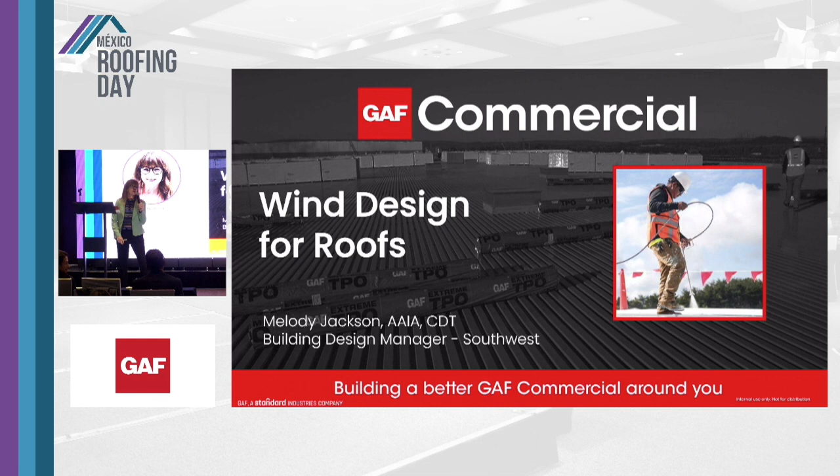Today we'll be talking about wind design for roofs. This is a very timely topic considering we just had Hurricane Otis that came in on the western coast of Mexico. How many of you have had hurricane damage to your home or your business? Anyone? Am I the only one? I have a beach house on North Padre Island near Corpus Christi, and I had flood damage and wind damage. I lost my roof from Hurricane Harvey. So this is a topic that has impacted me personally. I've done a lot of hurricane area projects as a spec writer, so this is kind of a topic that's very close to my heart.

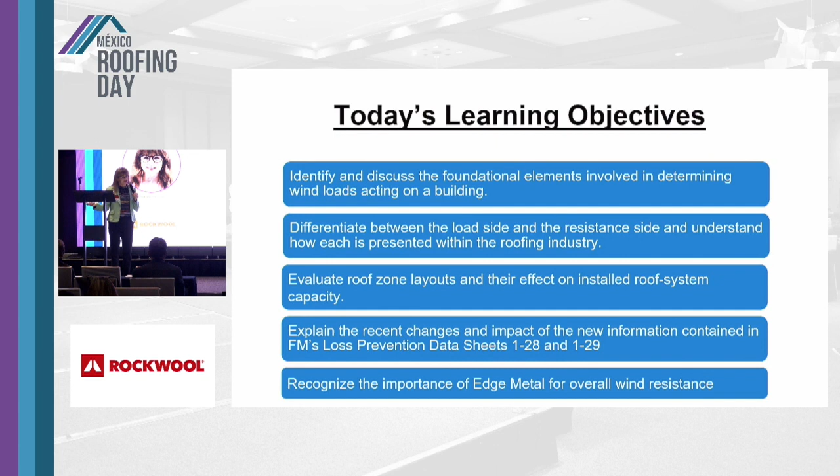So we'll be talking about wind design for roofs today. So today we'll identify and discuss foundational elements involved in determining wind loads acting on a building. So we have various loading things to look at.

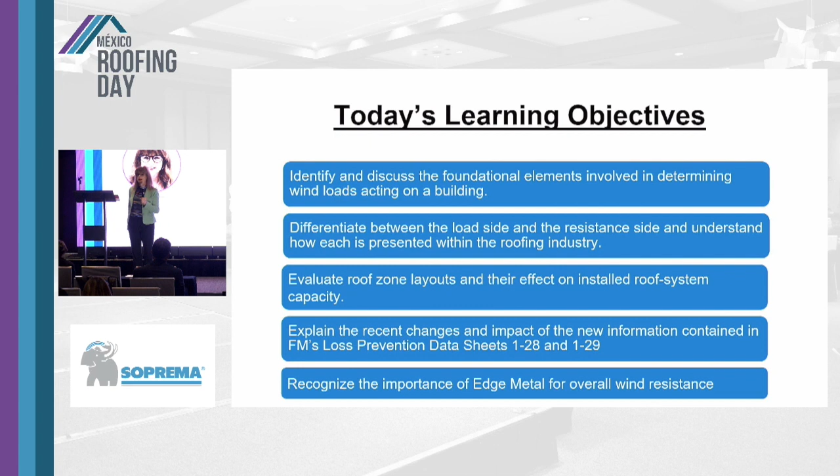We'll learn the difference between the load side and the resistance side, and we'll understand how each is presented within the roof industry. We'll evaluate roof zone layouts and their effect on the installed roof system, and we'll explain recent changes and the impact of new information from FM Loss Prevention Data Sheets 1-28 and 1-29. These are really important documents for us. And we'll talk a little bit about edge metal and how important that is for designing a roof system that will withstand these hurricane uplift conditions.

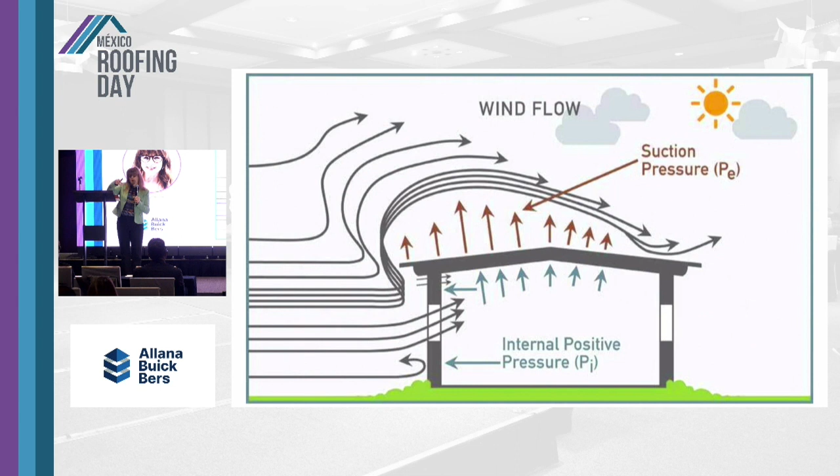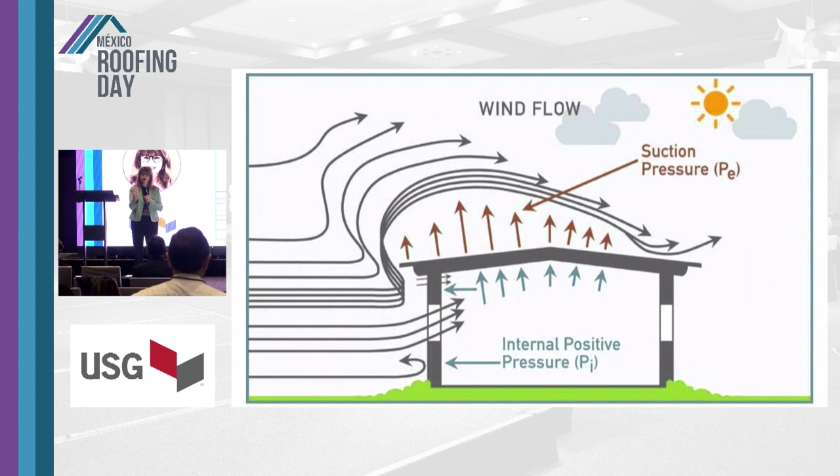So first of all, we'll just look at a simple building here, and we'll see as the wind approaches, it will go up and over the roof, and that will cause a negative pressure, a negative design pressure, pulling our roof up and off of our building. If we have a breach in the building envelope, we lose a door, the glass is blown out of a building, we have a large missile that's destroyed our windows, we will have internal pressurization of the building, and now we have positive loading pushing the roof off from the inside. So we have various mechanisms to lose our roof.

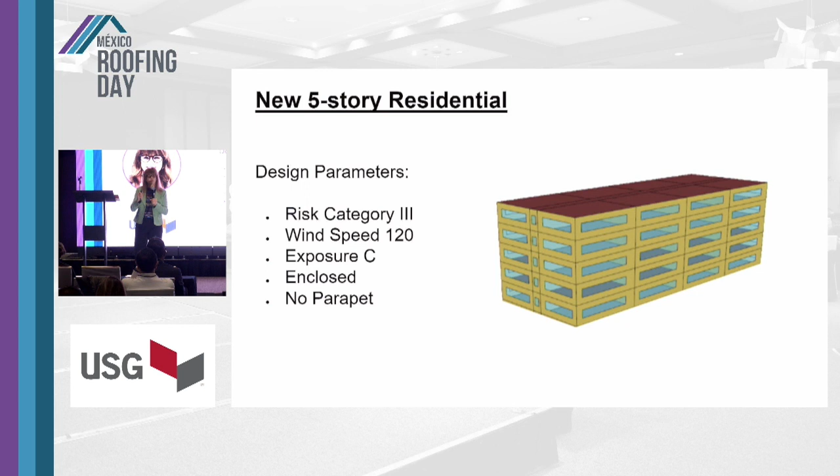But it's not. We have high wind speed, 120. Hurricane Otis was much, much more. This is exposure C, a pretty flat terrain, so this might be the biggest object in the area, and it's enclosed. We'll go over later about what a partially enclosed or an enclosed building means. And this project has no parapet.

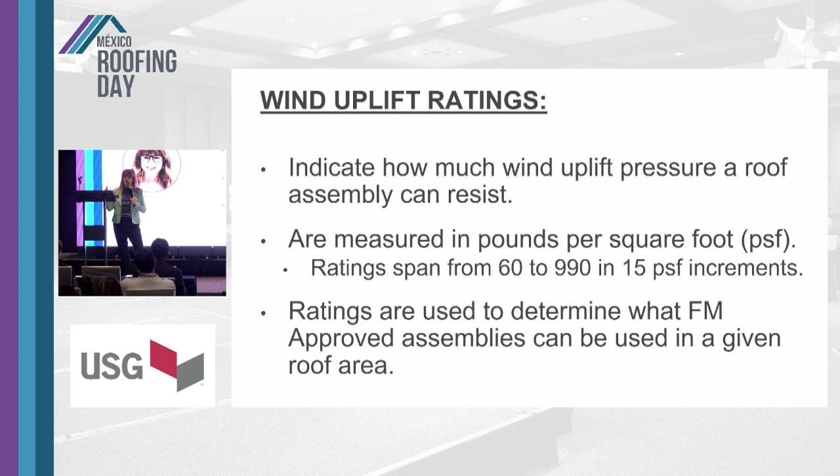Our wind uplift rating indicates how much wind uplift pressure a roof assembly can resist. This is not just the roof membrane, this is our whole assembly. It's measured in pounds per square foot, with ratings spanning from 60 to 990, in 15 PSF increments. This will be important to remember later when I talk about going from a 1-75 rated system to a 1-90, so you can see that 15 PSF increment.

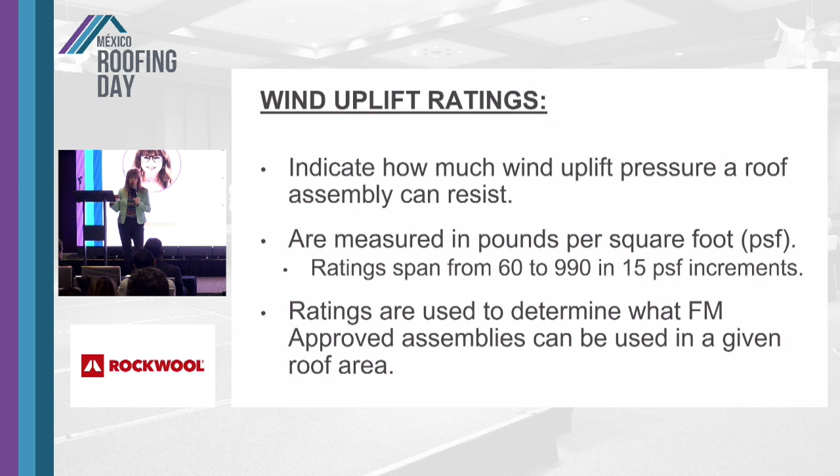The ratings are used to determine what FM-approved assemblies can be used in a given roof area. First we'll click on the wind tab, which will give us a rating. But first we need to think about the load side variables that help determine that rating: surface roughness, the location of our building, the basic wind speed for that location, the exposure classification, and the roof dimensions, which are important.

First we'll look at the surface roughness category, which is roughly defined, not the strict definition. We have roughness B, which is urban and suburban areas like Mexico City or the suburbs, or wooded terrain with lots of obstructions where the wind just doesn't go past. Surface roughness C is pretty open terrain, where obstructions are generally less than 30 feet, so this is pretty flat open country. Surface roughness D are water surfaces or flat, totally unobstructed areas.

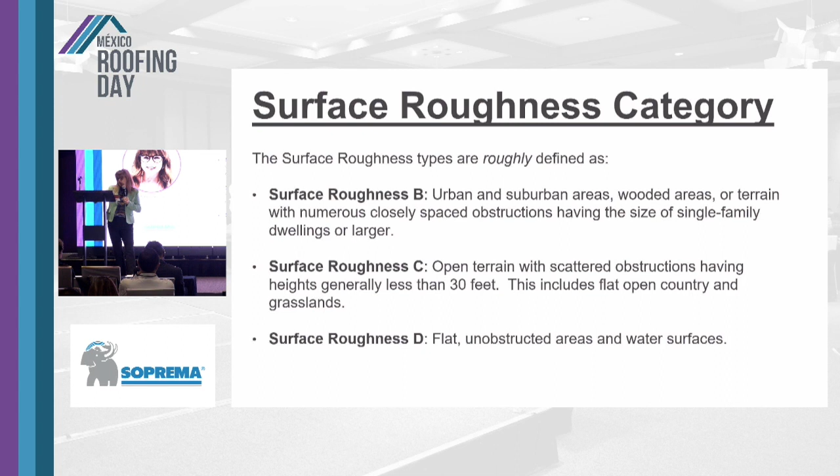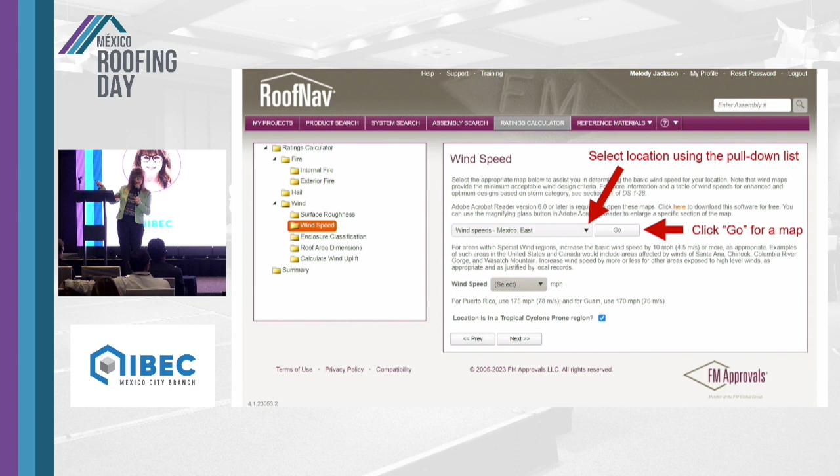We also need to look specifically at the location of our building and the basic wind speed, and FM RoofNav will help us determine that. After we click on wind speed, we can enter Mexico East, Mexico West - there are several locations you can select. For this sample, I selected East. Then you click Go, and RoofNav gives you a wind map for the eastern coast of Mexico. This is our LPDS 1-28, and this is going to be really golden information for you.

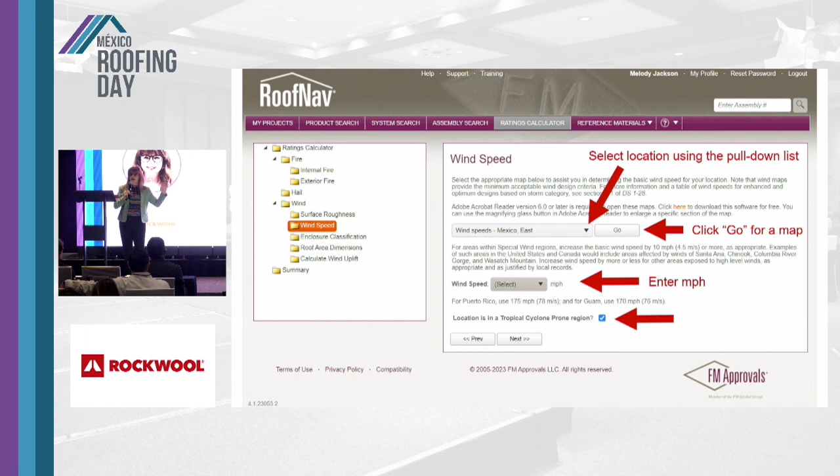So we will take this information and use it later. But there's another way to do this: we could enter the miles per hour if we already know the wind speed at our location, or if we want to increase the specifications to a higher level, we can select a higher anticipated wind speed than we would normally see in that area.

You need to keep in mind that your specifications for your project are minimum standards. Another way to think about minimum standards is it's your best, worst building. So for something like an essential facility, like a hospital, police station or fire station that needs to remain in operation during a storm, you want to design to a higher level. Here you could put in the specific wind speed you have in mind, and we will always check that blue box: Location is a tropical cyclone prone region, when we're designing for hurricane uplift.

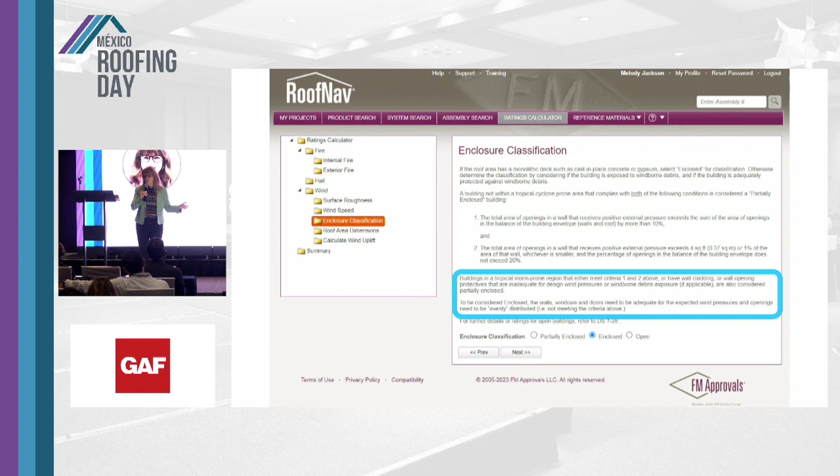So we need to also think about our exposure classification. What does that mean? In a tropical storm prone area where we think we will lose windows and doors, for example in a home, houses are usually designed to a lower standard compared to commercial buildings. So we will probably lose a window. We have flying missiles, rocks, lawn furniture that blows around - we have a 4x4 that could go through your roof or window.

So we will consider those partially enclosed, but if we've designed the building to very high standards so that our openings, our doors, our windows, big roll-up doors, are missile D impact resistant, then we could consider that an enclosed building. This will make a big difference in getting to our end result. For this sample, I have selected enclosed buildings, because we're designing a wonderful building that should withstand a hurricane.

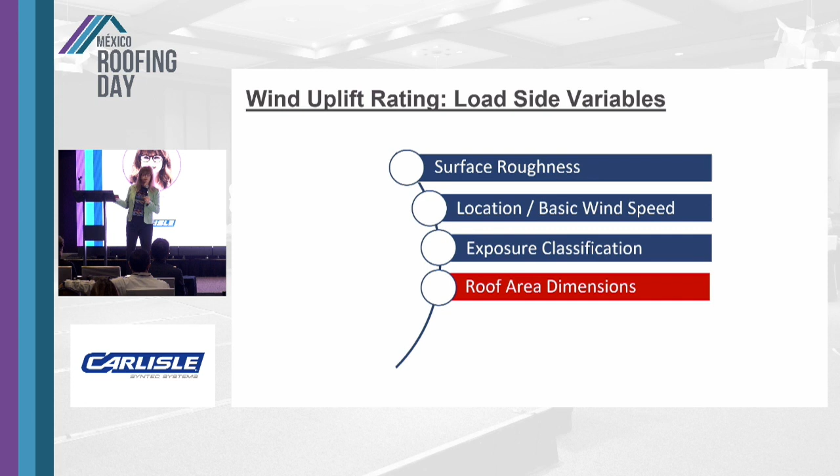Then we have to consider our roof area dimensions. These are very important because this will change a lot of things on your project, including fastener spacing. So our next step would be to enter our roof area dimensions, and you'll have pop-up boxes on the right so you can enter your dimensions. Super simple. What you get is your wind uplift calculated, and you get a sheet that looks like this on the right.

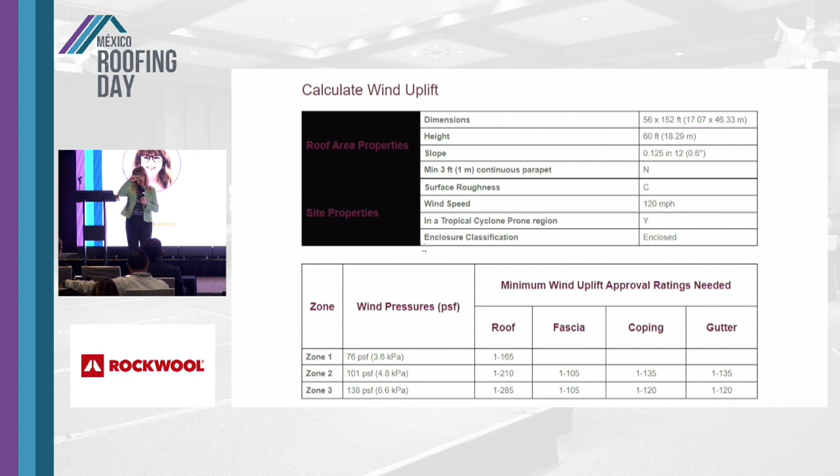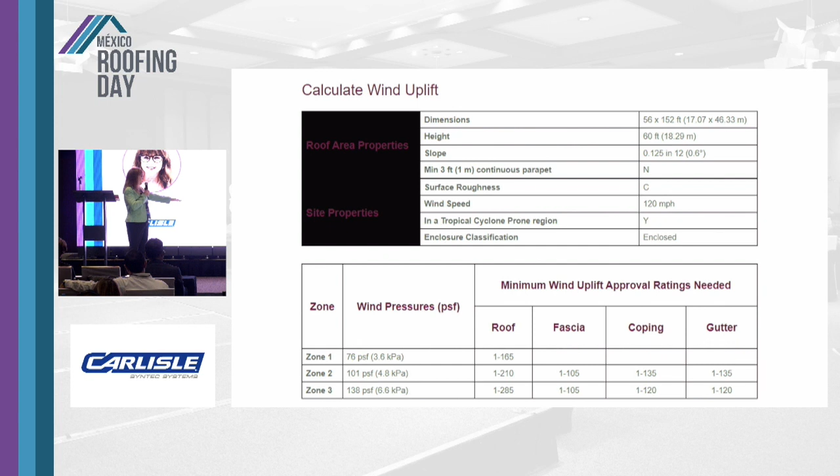I'm going to look at that in two parts so you can actually read it. The first part on the top just gives you back the information you just entered, so this is a real easy way to check your work and make sure you entered the right numbers. At the bottom, you will see your wind pressures in PSF that RoofNav has calculated for you. For zone 3, which is our corners, that's where we have the highest wind uplift - we have 138 PSF. So is that the number we need?

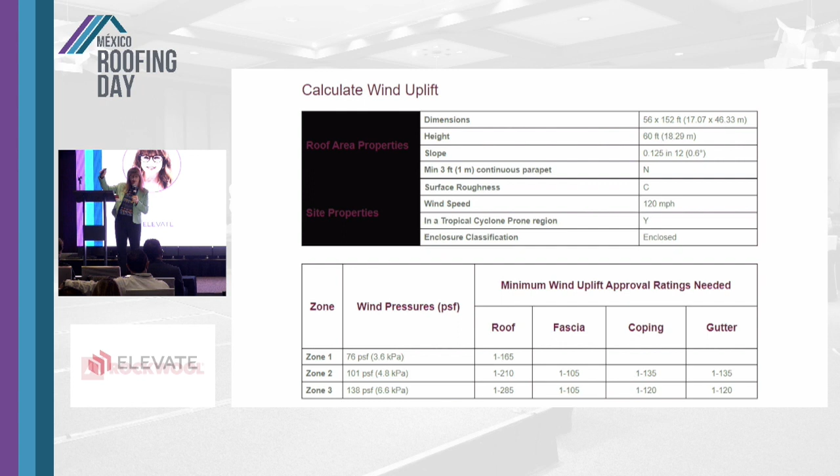No. RoofNav has applied a safety factor of 2 and has determined that we need a 1-285 system. If you want to design to a higher standard, you could go up 15 more PSF, that's our 15 increments, and we could do a 1-300 system.

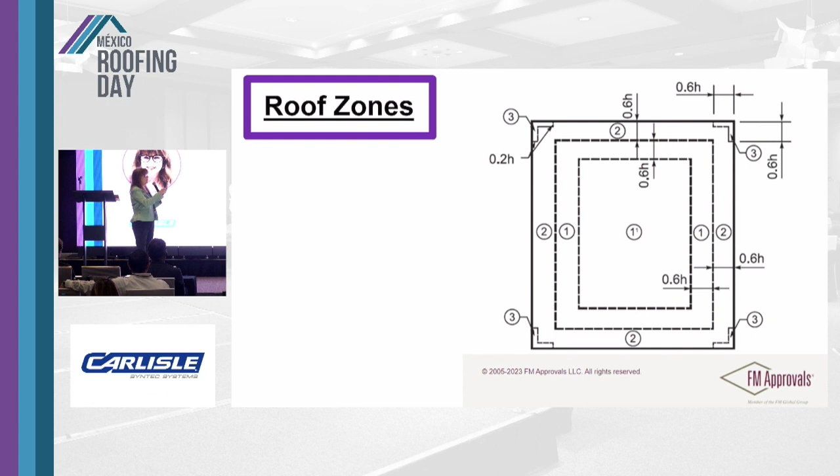So here we're looking at our roof zones. This is very simple in a rectangular shaped building, but what if you have an L-shaped building? What if your building is shaped like a Z or any other crazy thing an architect could come up with? And most of the time they will come up with something unusual. Then a lot of things change. So your outside corners will always be zone 3. If it's an inside corner, it's not. It can get very convoluted. There's ways to dive deeper into that, but I did not have time today. But just keep in mind that that will change.

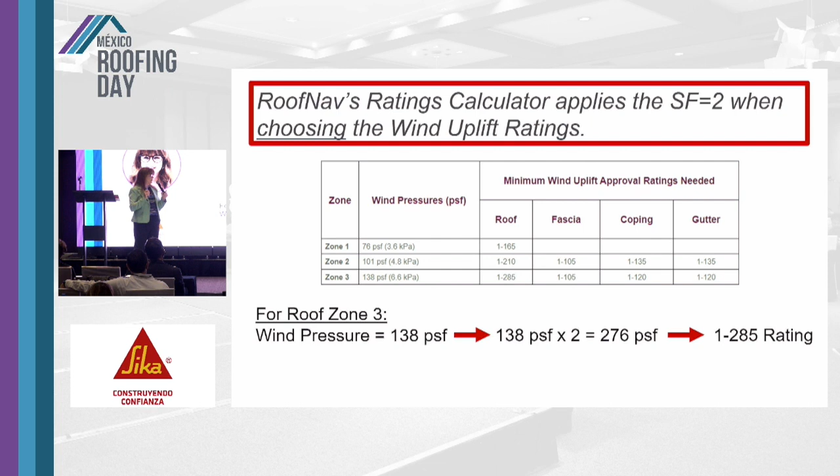Our zone 2 is the perimeter of the building, and then zone 1 is the main field of the roof. But our biggest takeaway is that RoofNav applies a safety factor of 2, like I said before. So we go from 138 PSF in this bottom corner, zone 3, and multiply that times 2, and then we need to jump up in 15 increments. So we end up with a 1-285 rating. So now what do we do with that?

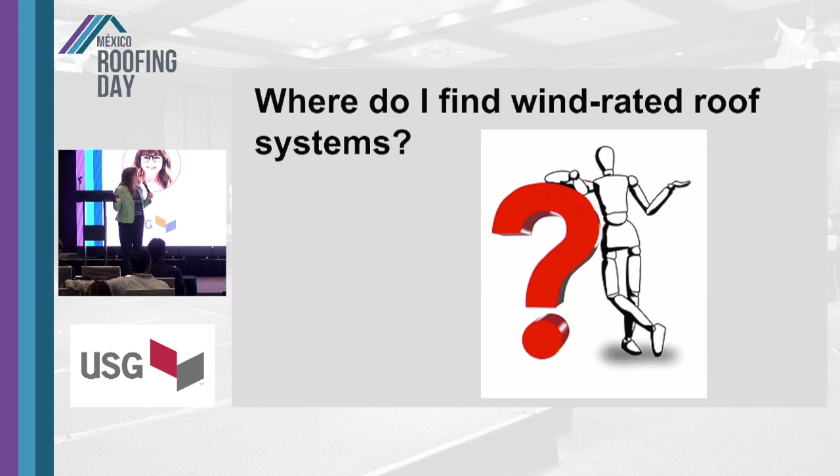Before we go further, we need to look at the wind uplift on the resistance side. So where do I find this wind rated system? Okay, that's the question. Like, where do I go next? There are various listing agencies that have roof systems approved for the uplift you have determined you need for your project.

So we've been using RoofNav, but a lot of people are very familiar with Miami-Dade. They were really the first to come up with these standards we want to adhere to, sort of the gold standard. I live in Houston, Texas, so when I was writing specifications full-time, I would always refer to Texas Department of Insurance, which also has a lot of ratings, so that's another way to do it. All of these are great listing agencies, but you need to be careful because some of them apply the safety factor of 2 and some do not.

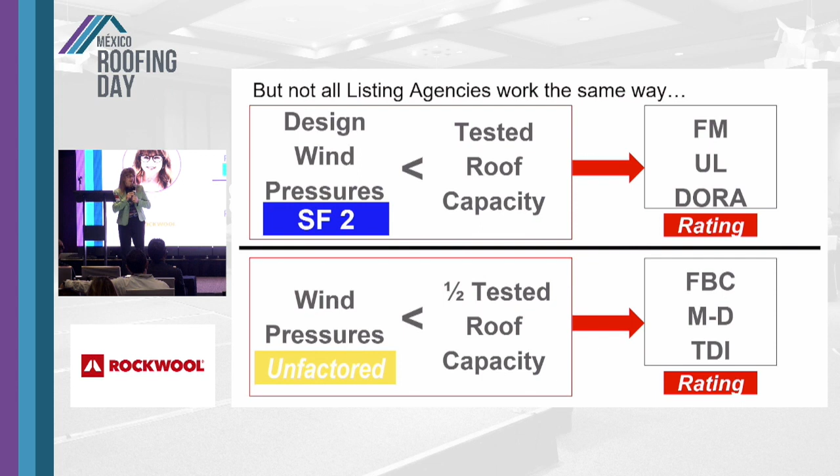So when you're looking at an FM rated system, you will see that the safety factor of 2 has been applied. We saw that before in that calculation, multiplying times 2. If you look at Florida Building Code Miami-Dade or Texas Department of Insurance, the safety factor of 2 is not included. So you have to be mindful of which listing agency you're using and exactly what information you're getting.

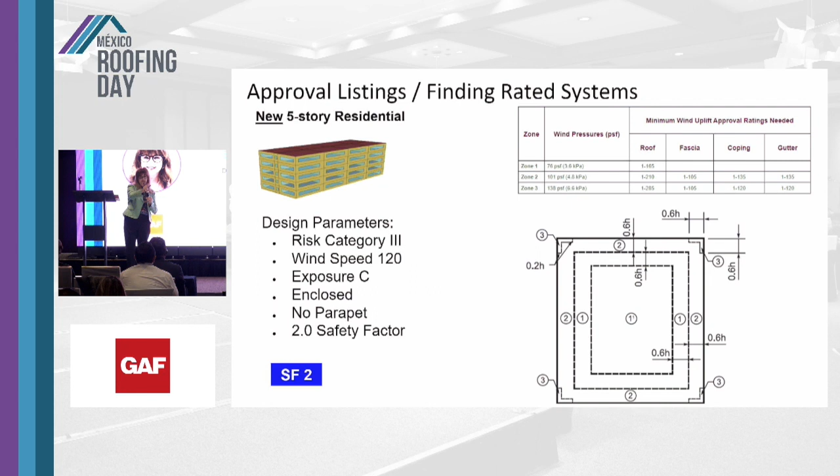So let's keep going with our RoofNav and select our actual roof system. Here we are. We have our data from the first part of this presentation, and we're using the safety factor of 2 since it's RoofNav. So we will keep going. Now we can select assembly search, that's the red box at the top, so we can get rated assemblies. If you just click that button, you get 1.1 million approved listings. So where do you go from there? There's still a lot of work to be done, and we can narrow that down.

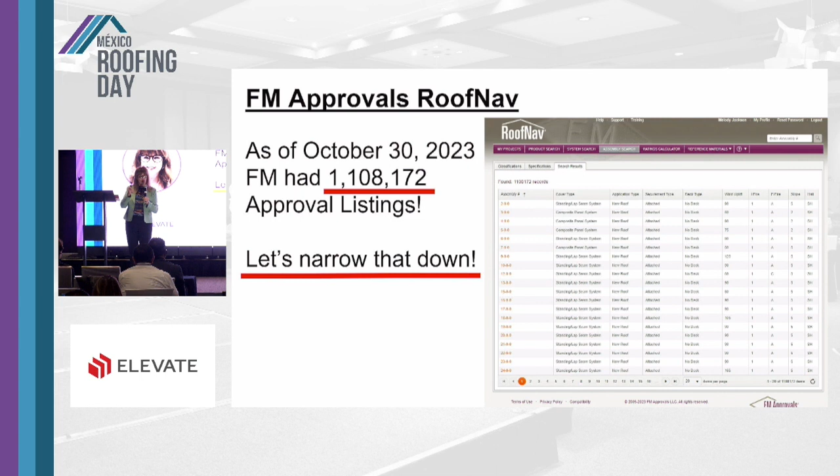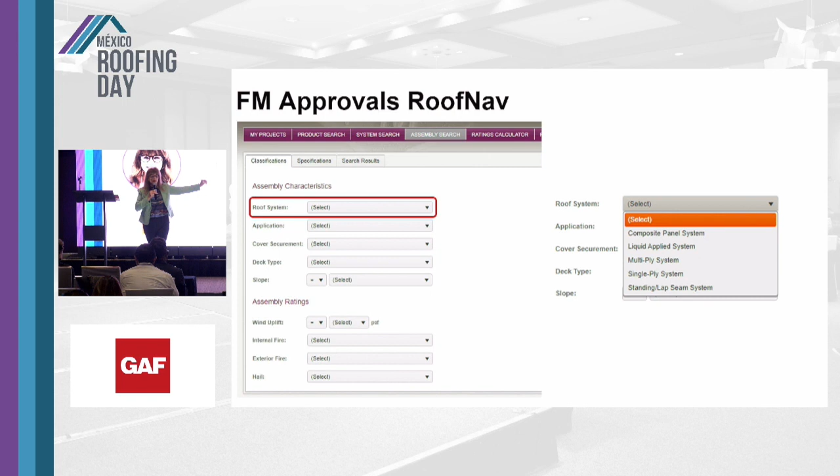So what we will do is go to assembly search and fill this out with all the information related to our project. For example, here we can select our roof system, and the pull down on the right says we can have a standing seam roof, a single ply system, a multi-ply system like a mod bit or an APP mod bit, a liquid applied system, and we heard about all those different systems in our last presentation on vegetated roof, right?

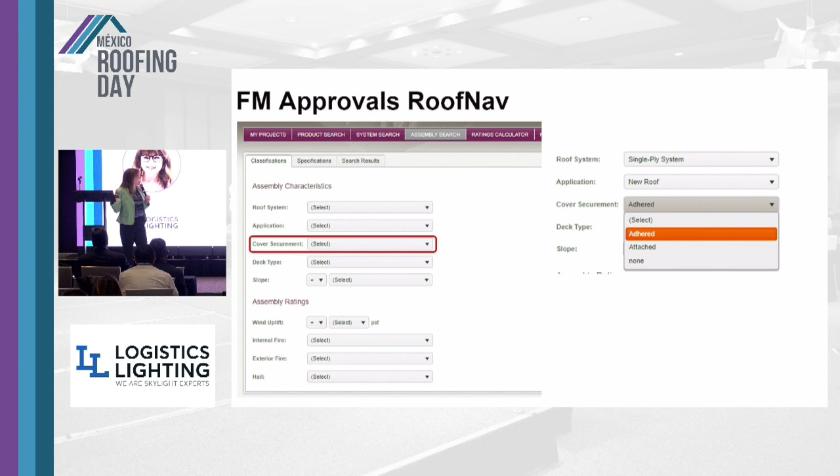So then we're going to think about the application. Is this a re-roof or is this a new roof? All of these things matter. We're going to pick whether we want it to be a mechanically attached roof or whether we would like an adhered system. It also had the choice of none, which I don't understand.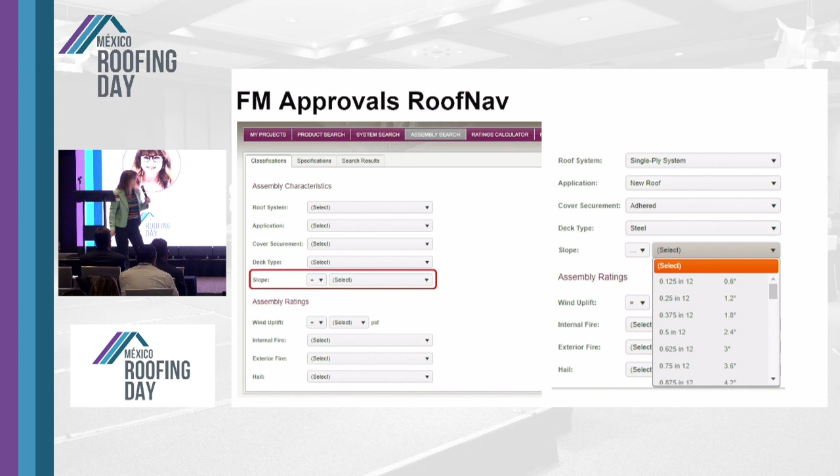We're going to select our deck type. If we know it's a metal deck, wood deck, or concrete, for example, we'll make our selections here. We'll enter the slope. Here, it gets very specific, so it's easy to select the slope for your project. And so now we have our assembly characteristics. These are all the selections we just made.

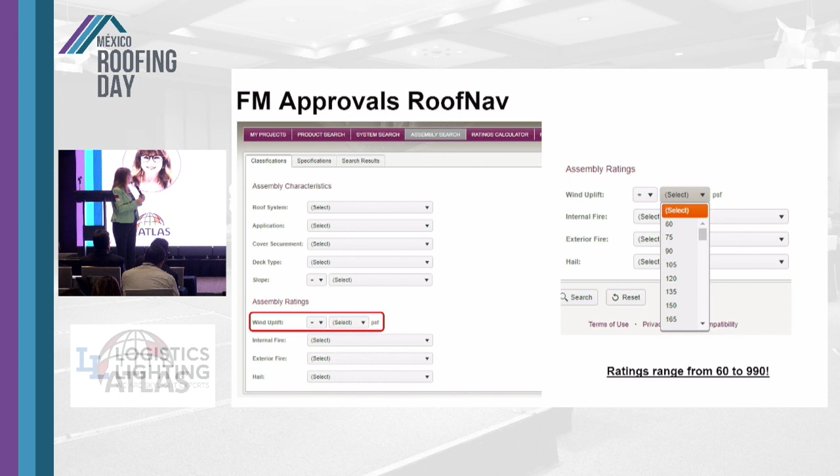So on our wind uplift, our ratings are from 60 to 990. We calculated that, so we can enter that number.

Here's where we can enter our internal and exterior fire protection ratings. If we want a Class A rating, we can select it there. And we can select whether we're in a hail region or not - you don't have to select that at all, but there's VSH for very severe hail, and severe hail.

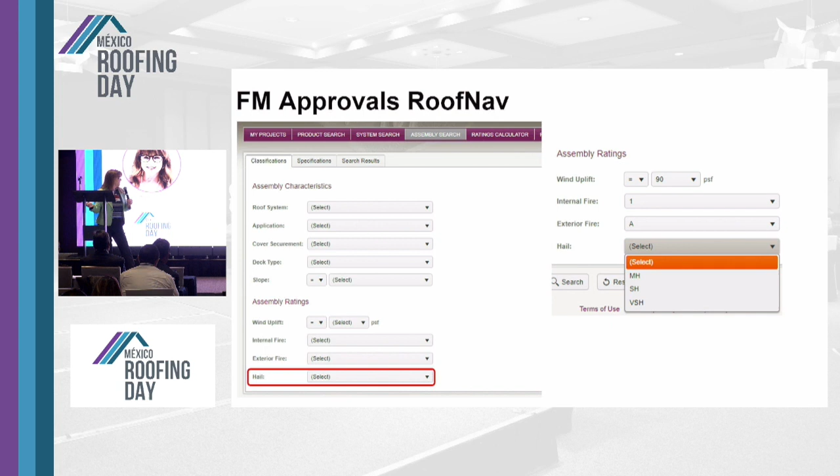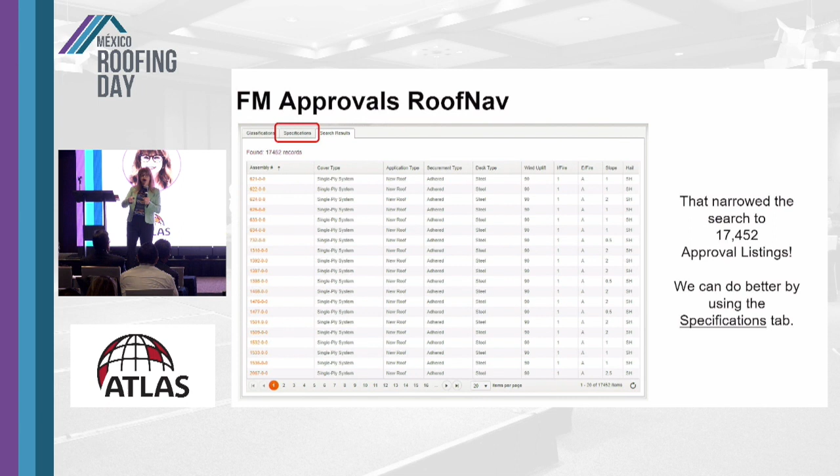Now we have all of these things I discussed already selected, and this helps us a lot because it narrows our search down to a little over 17,000 approved listings. So now we can go to the specifications tab and add even more information, which will bring this down to a smaller number, because no one wants to look through 17,000 listings.

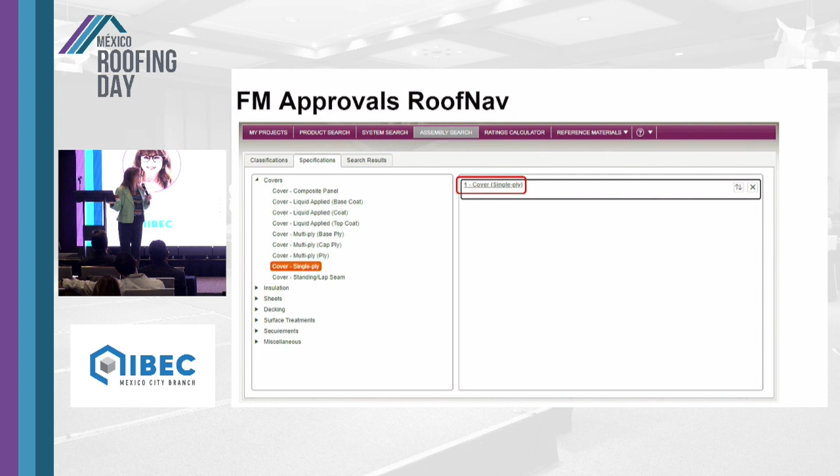So what we'll do is look first at the covers. It's called covers, but basically this is our waterproofing membrane for our system. I've selected single ply just for the example, and then we'll enter details about this single ply roof we've selected.

So here I have selected a company. If you know you like GAF, you enter that. If you like Soprema, you enter that. If you like Johns Manville, you enter that, and this will help you narrow it down.

Just by selecting GAF, we went from 17,000 choices to 842 for GAF alone, and the other manufacturers will similarly have a lot of choices.

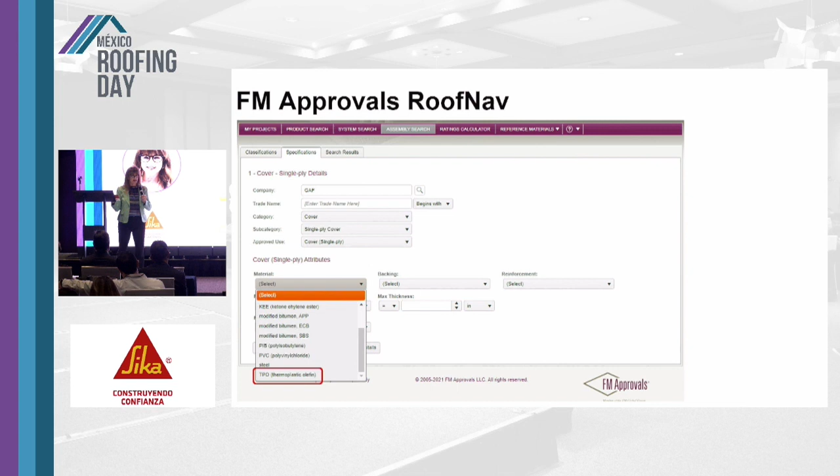Now I'm narrowing my selection even more. I'm going from single ply membrane - I want a TPO membrane, because I'm a TPO fan. I'm going to enter the thickness desired, so on this sample it's a 60 mil membrane. If you're designing for an essential facility, I'd probably go to an 80 mil membrane, to beef up the system a little bit.

And now this has narrowed us down to 24 approval listings, but we can do even better than that.

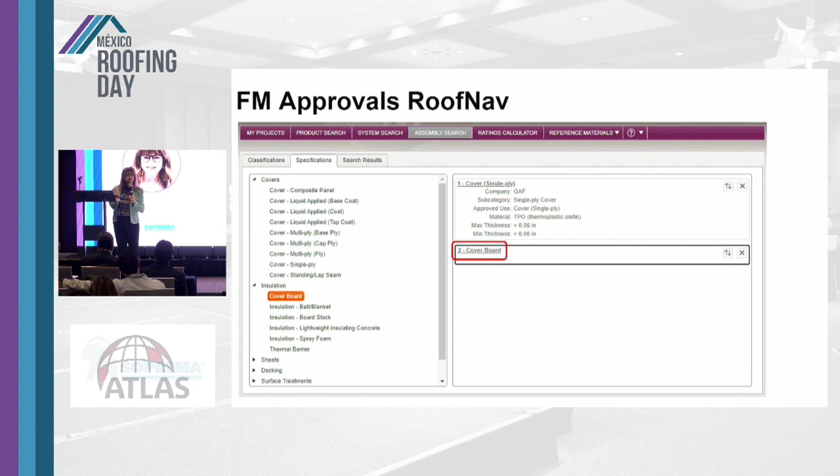We can start selecting other parts of the assembly, like our cover board. You always want a cover board. There's a lot of controversy about this - a lot of people say, oh, we don't need it, we install roofs without a cover board all the time. But the cover board is really going to help you in high uplift situations and in hail situations. Cover board is very, very essential in my opinion.

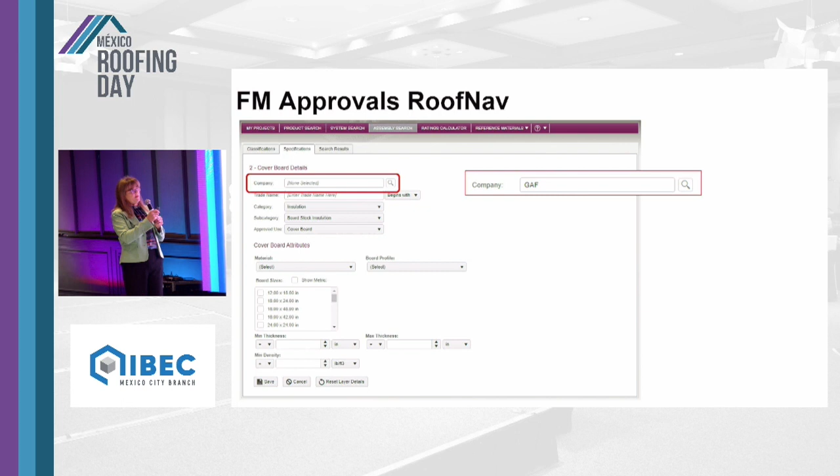We can select the manufacturer of the cover board, which narrows it down even more. Now we're down to only 2 systems that are approved for the uplift we entered earlier. So now we have an assembly number - this is what we're looking for.

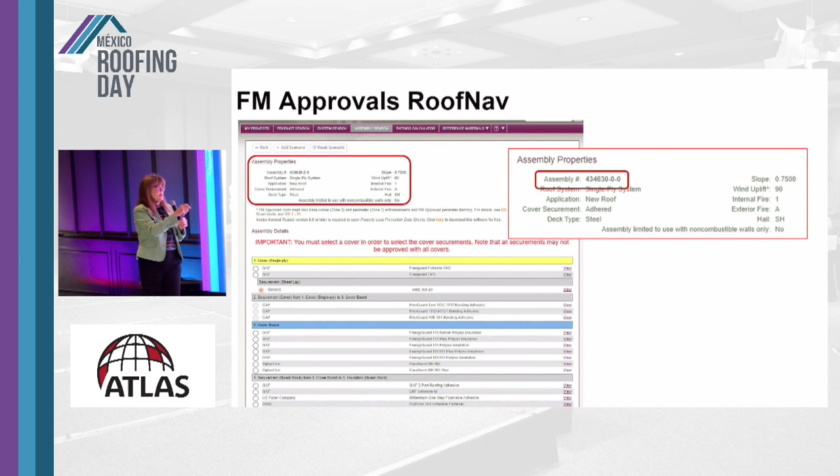With that assembly number, you see on the right we can go on and enter even more information. So when we start making these selections, over on the far right side, we'll see the little view button. When you click that button, you'll get more information about the product selection you've made.

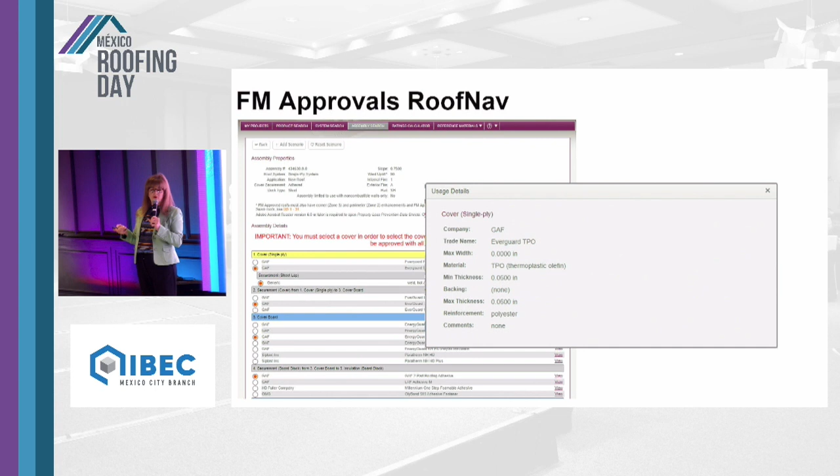For example, here for the single ply GAF membrane, we see the membrane itself is called Everguard TPO - it's a 50 mil, we entered that, with polyester reinforcement. So just a little extra information about the selections you have made.

So here we're looking at the cover board - we narrowed it down to a GAF manufactured cover board. And that's the little click on the view - it gives you that info.

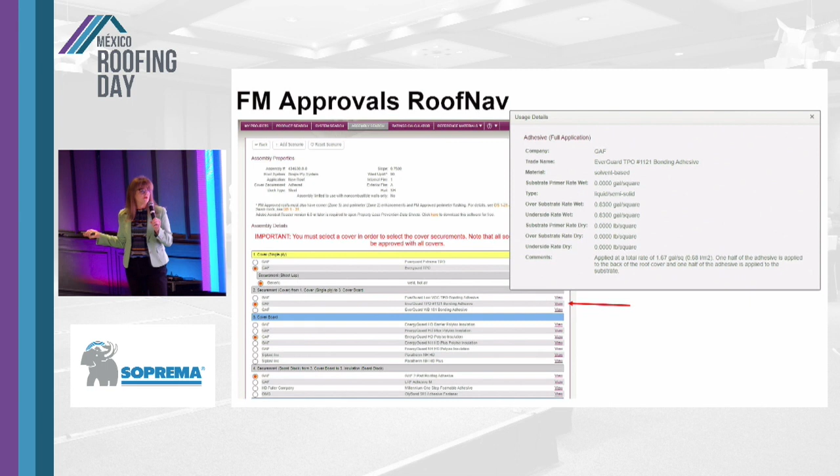So now we can go a little further, going down to the cover board - the view gives us this. When we select polyiso insulation, we get this one. And we continue making selections based on the board stock, the cover board, the insulation.

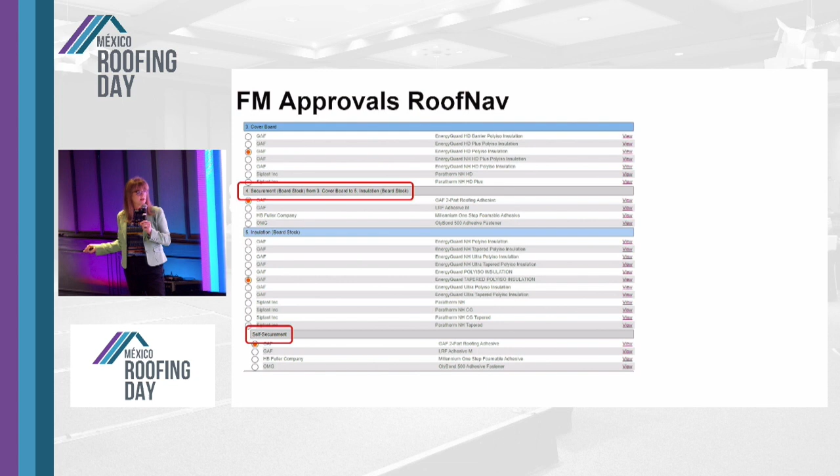And we are now thinking about this as an entire system, not just the waterproofing membrane itself for the roof.

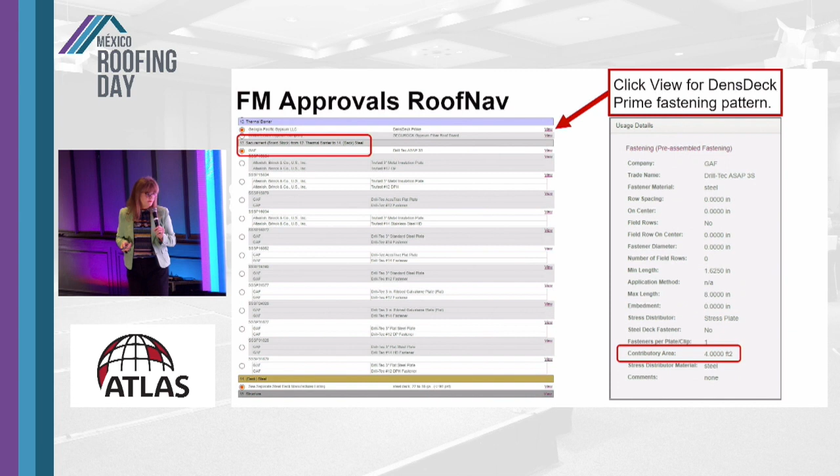So here we are going to select on our securement to get a fastening pattern for our system. We're looking at a contributory area of 4 square feet, and what this looks like, if you do it in plan, in zone 2, we will have this fastener pattern.

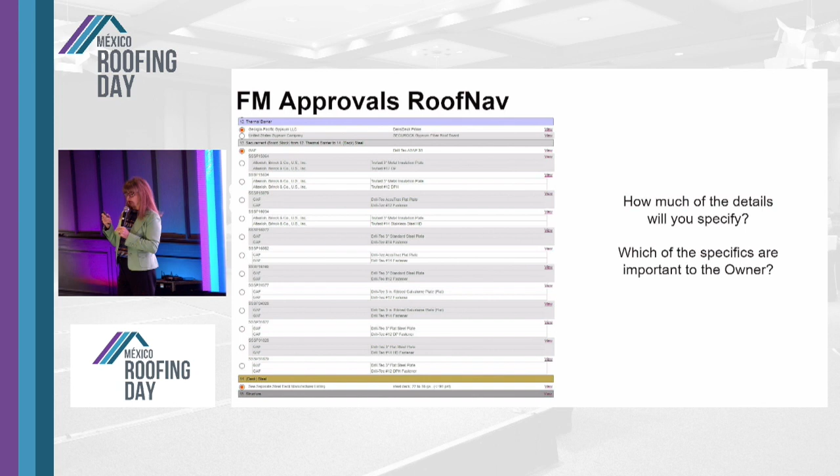We'll come back to that and see how it changes in the different zones on our roof. So we can add more information - the owner may have specific products or manufacturers they want, or the architect may be specifying this. All of these things are taken into consideration - you can add more and more info if you want to.

One thing to keep in mind is the RoofNav ratings calculator determines our designed wind pressure per the LPDS 1-28. Remember that RoofNav always applies that safety factor of 2. When you look at RoofNav's wind uplift ratings, they're determined by actual physical testing, and these increase in increments of 15 - so a 1-60, 1-75, 1-90 will not have the safety factor built in.

So this gets a little confusing - you really need to know exactly where you're at in this process. So a 1-60 rating means that this roof will fail somewhere between 60 and 74 PSF, because 1-75 would be our next level up, right?

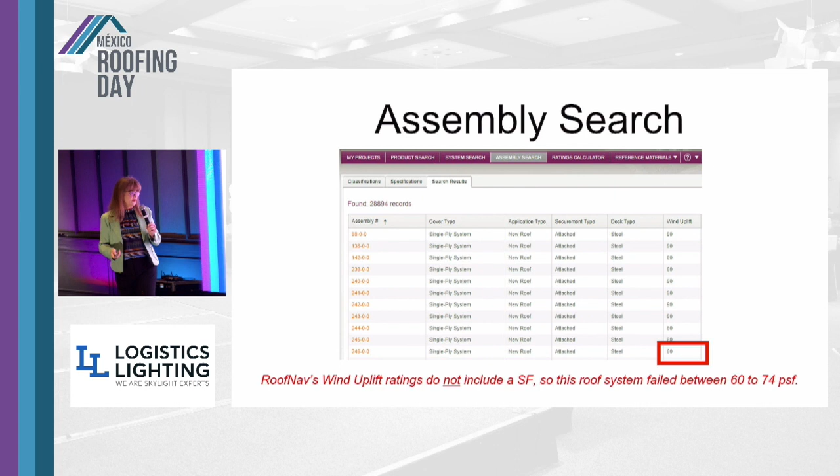So on our assembly search, if we just type in our assembly number, you will get something that looks like this - so we'll have a 60. That did not include our safety factor.

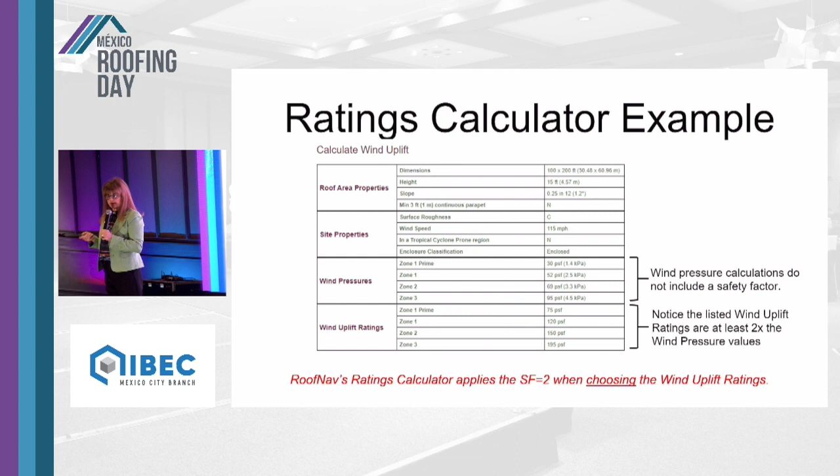If you look at the bottom two sections of this diagram, you'll see that the wind pressure calculations do not include our safety factor, and that our wind uplift ratings do include the safety factor of 2. I'm repeating this because it's really important to distinguish between these two numbers.

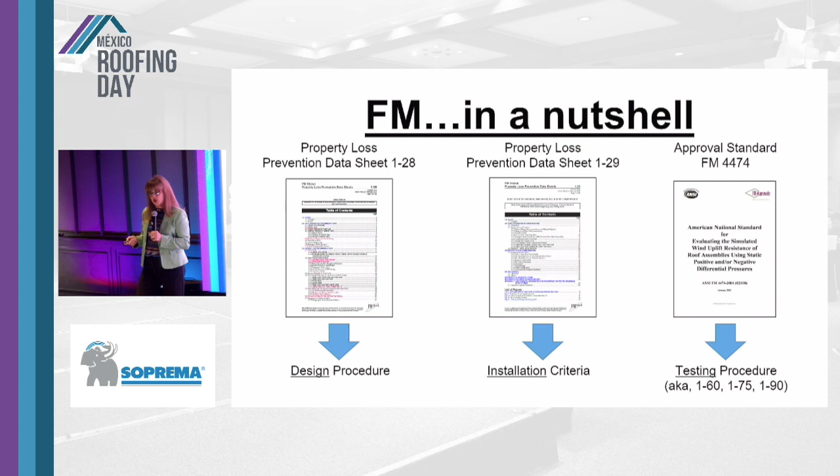So for FM in a nutshell, our Property Loss Prevention Data Sheet 1-28 walks us through our design procedure. 1-29 has installation criteria for us, fastener patterns and so forth. And the FM 4474 is our testing procedure that gives us the rating of the system, the 1-60, the 1-75, the 1-90, for example.

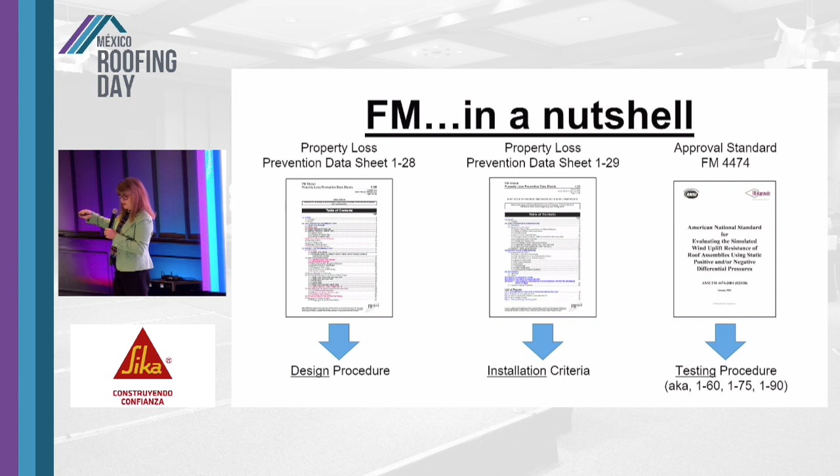So now that we've calculated this for only one of those zones, we'll want to go back and calculate it for each of our roof zones - zone 1 in the field, zone 2 in the perimeter, or zone 3 in our corners.

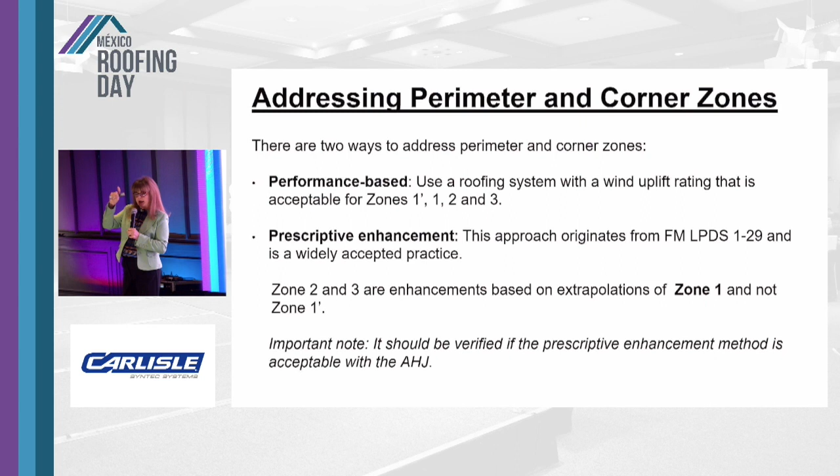We can do it that way, although there's a prescriptive method we can use that's defined in the LPDS 1-29, and this is a very widely accepted practice to do it this way. Zone 2 and zone 3 are calculated from our zone 1 values.

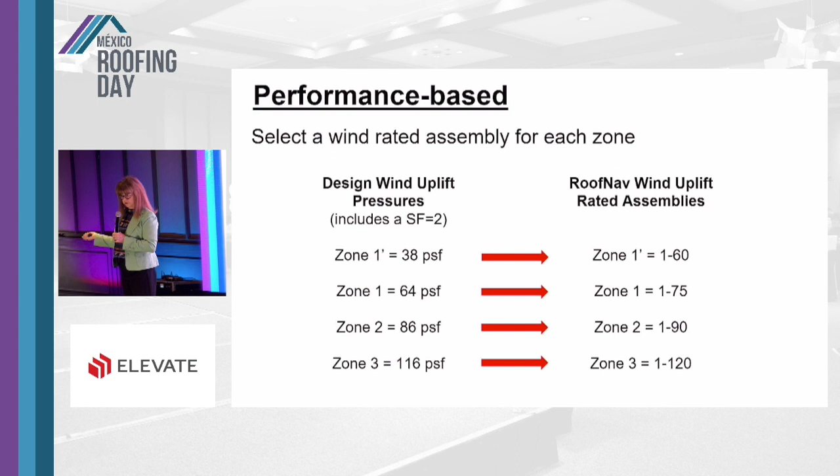For example, we have determined zone 1 prime, 1, 2, and 3 in the column on the left. That's our design wind pressure, our design wind uplift pressures, and that includes our safety factor of 2. Our RoofNav wind uplift rated assemblies are seen on the right. And you can see, for example, on zone 3, 116, we're going to round that up.

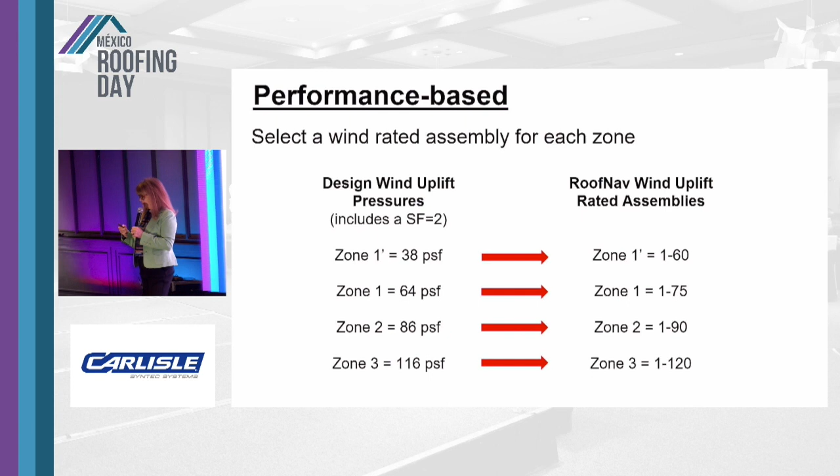To 120, because we're looking at it in increments of 15. So we'll always round up. In zone 1, for example, we're looking at a 1-75 system. Our extrapolations are always taken from zone 1, not zone 1 prime.

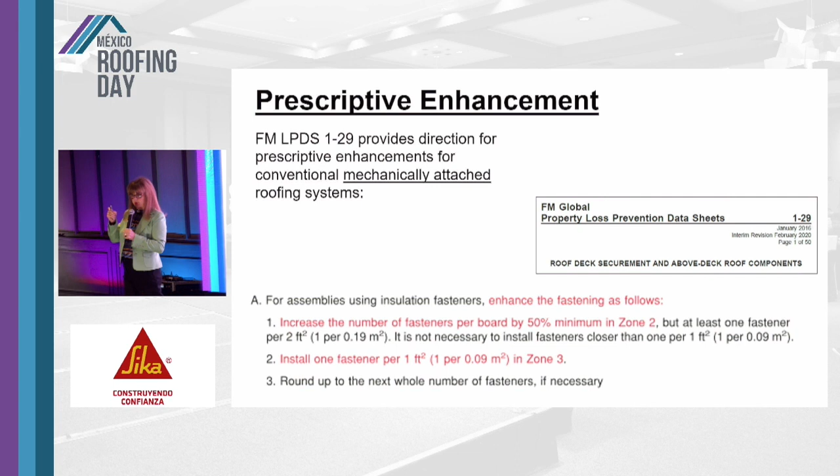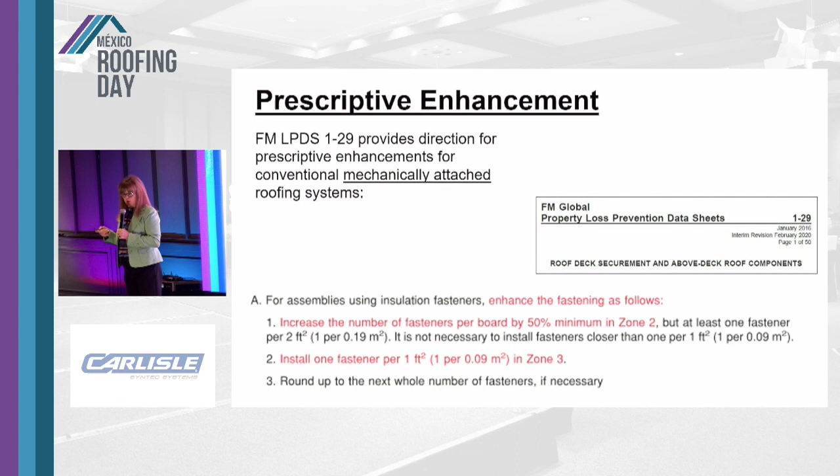So here's the prescriptive enhancement that LPDS 1-29 tells us we can have. We can use the number of fasteners from zone 1 and increase that by 50% for zone 2. Sorry about that. And in zone 3, we'll be looking at 1 fastener per square foot.

And we always want to round up. So if you get a number that's got a half or a 0.25, you'll always want to round up there. So let's look at an example here.

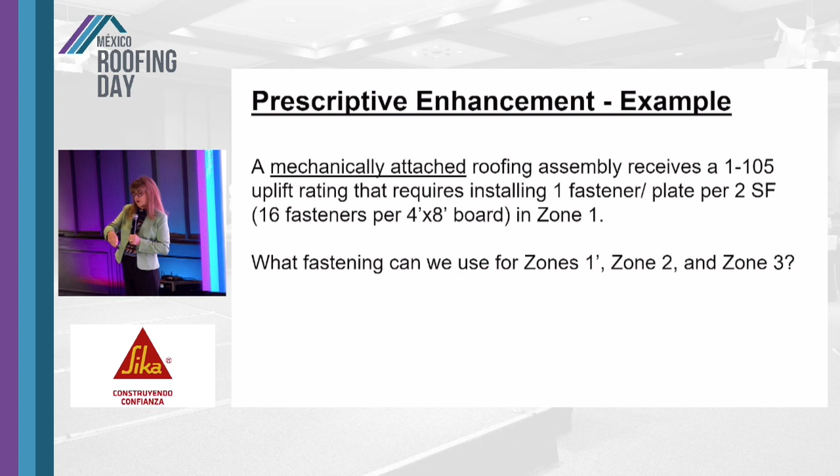We've got a mechanically fastened roof with a 1-105 uplift rating, and for that one we need 1 fastener/plate per 2 square feet, or 16 fasteners for our 4x8 board in zone 1. So what will we use in zone 1 prime, zone 2, and zone 3? Let's take a look at that.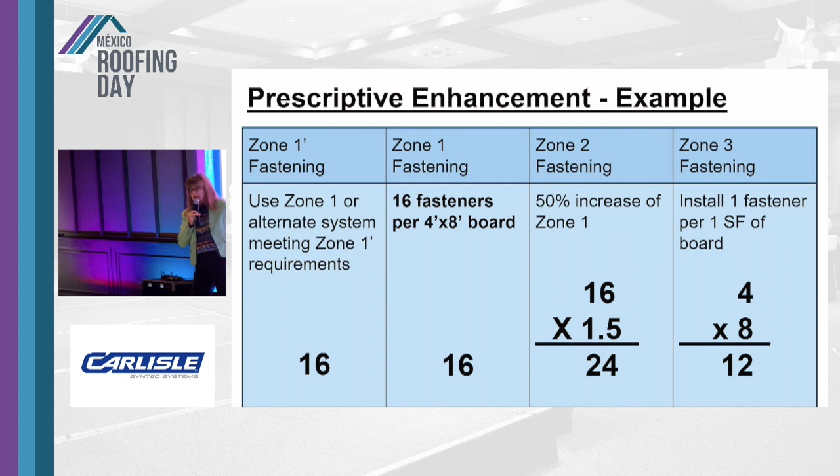So here's what we've got. We're going to start with our zone 1 number, 16 fasteners per 4x8 board. We'll use that same value in zone 1, which is the first column. We'll multiply times 1.5 to get zone 2. And then for zone 3, we will have 1 fastener per square foot.

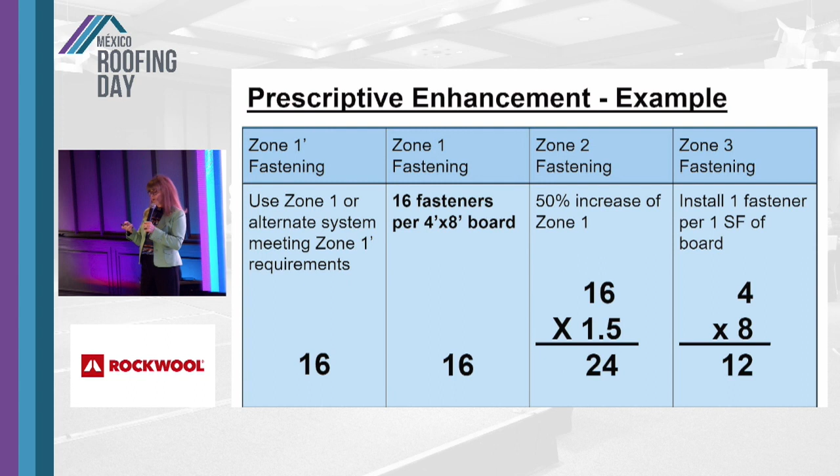So this is how our fasteners will be distributed on our roof. Now, this is the fastening pattern, for example, for your first layer of polyiso. It's best to have more than one layer of polyiso where you can stagger the joints and avoid that thermal and moisture infiltration that can occur if it's just one layer of polyiso. And then above that, we're going to have all adhered layers.

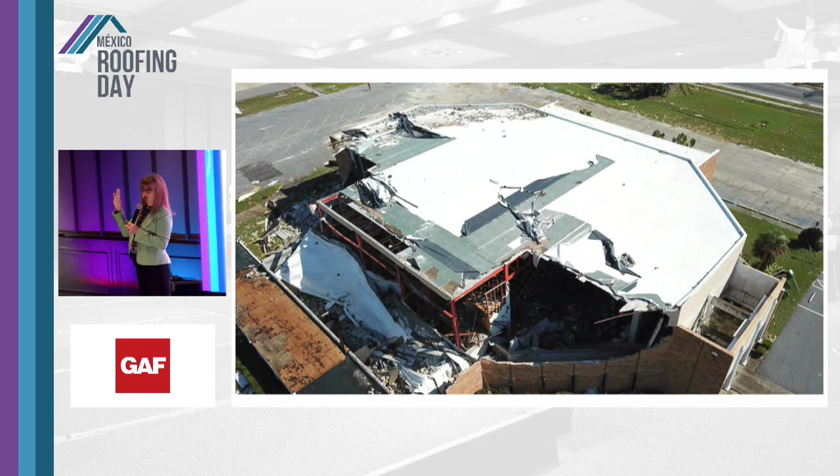So let's talk for a moment about edge metal. This will be considered zone 4 and 5. Zone 4, for example, is the face of the building - our vertical surface on the building - same with zone 5, and those are different parts of the building.

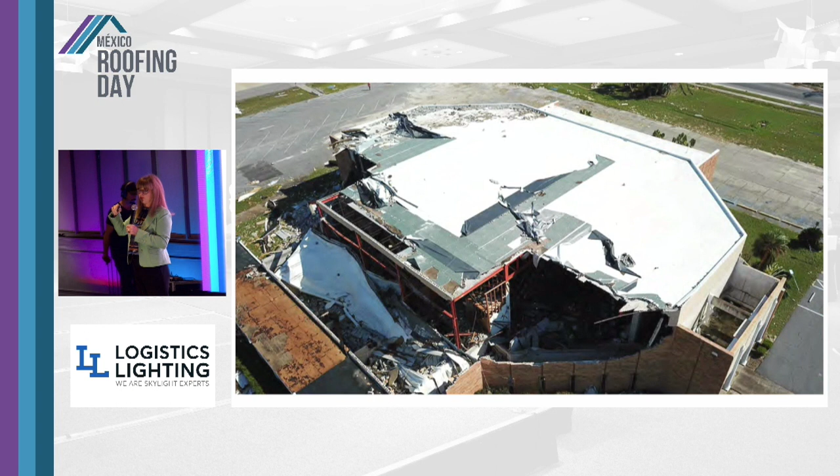Here's what we don't want to see. I see huge pieces of roof that just came off. It's not that the roof was damaged, but it's just blown off of the roof. And we can avoid some of these problems by having a good edge metal selection.

A lot of people don't know about this, so I would recommend that you take a little time and dig into edge metal and what that means for you. Let me go back one slide.

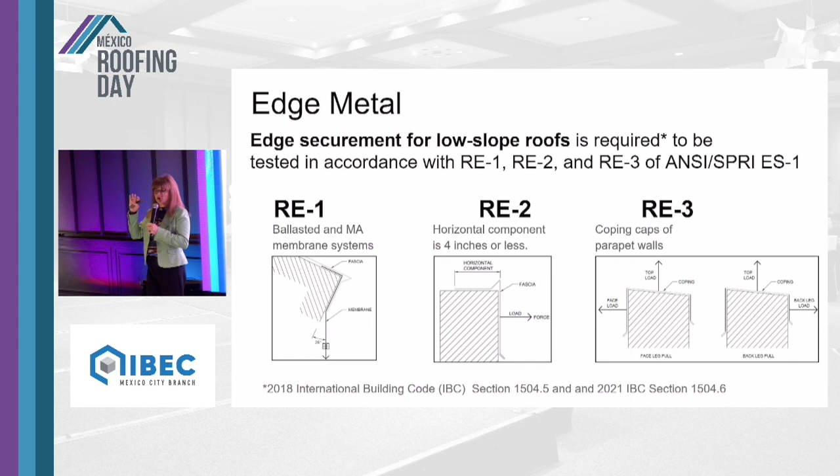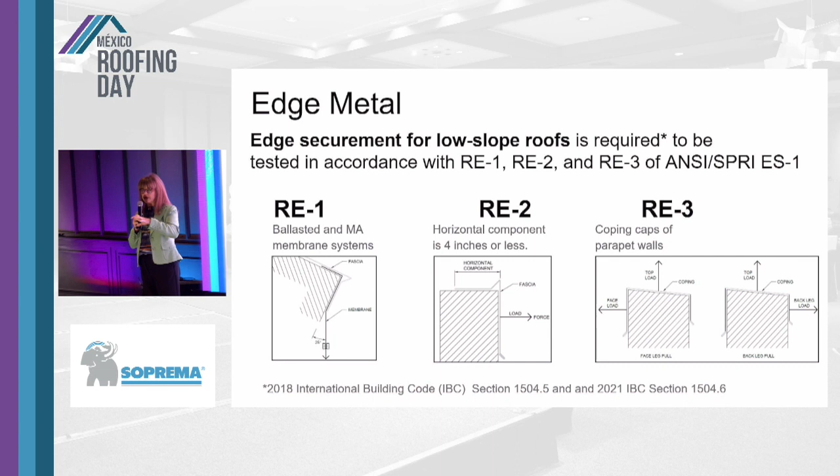It's really important to remember that these are tested edge metals. A field fabricator can bend metal that may look exactly like this profile, but it is not a tested ES1 edge metal. So you really want to try to get this directly from a manufacturer that has passed all of the testing requirements for ES1, not just something that looks like the exact profile.

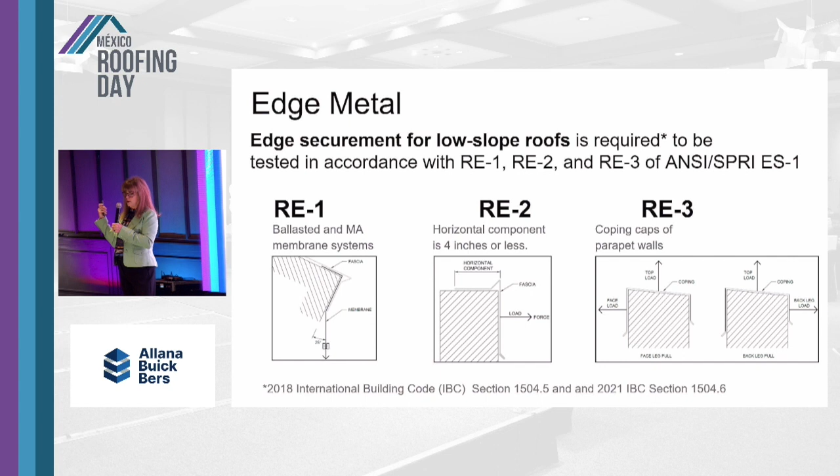Because the ES1, when you buy those products from a manufacturer, they also include all of the fasteners. It's usually pre-drilled fastening patterns all the way down the metal, and this is all used in this uplift rating that they get for these particular profiles.

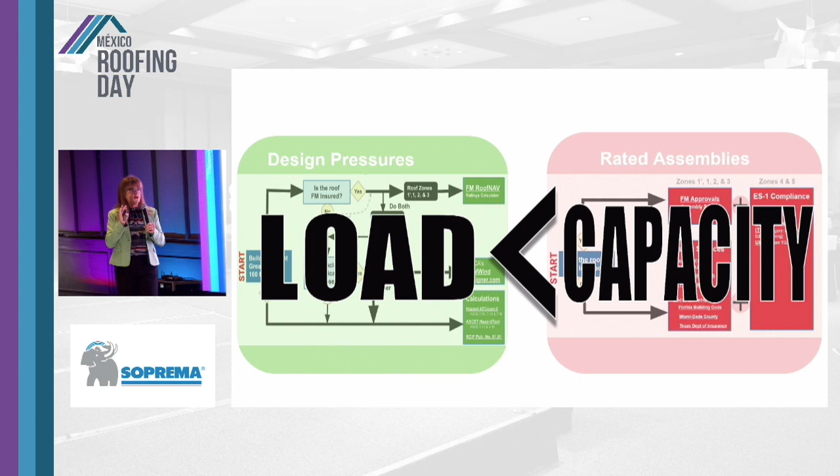So to wrap it up, our key takeaways are that our load is less than our capacity. So our design pressures will always be less than the capacity on our rated assemblies. We can increase those values for essential facilities, for example.

We talked about how to use FM approvals and our RoofNav system. I would encourage you all to get on RoofNav and just walk your way through this. It's pretty simple. If you need to contact me, if you have problems with how to walk through it, just catch me after the presentation and give me your card and I will send you some more information. It's a lot to cover in a short amount of time.

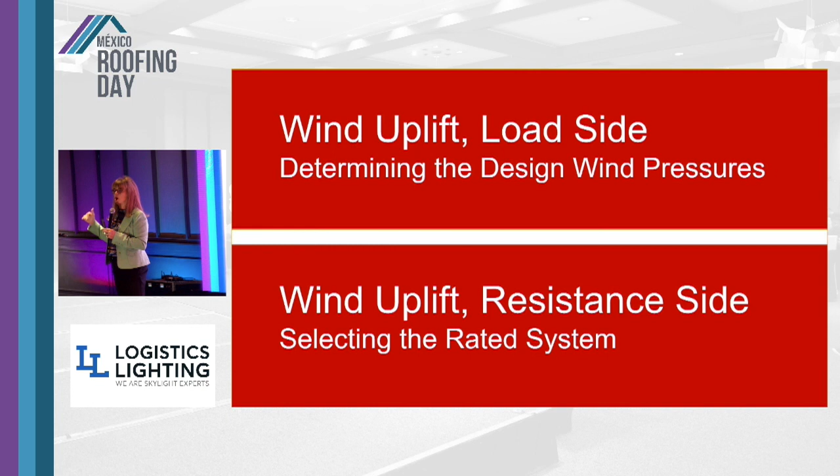So we talked about our load side, which was the wind going over our roof, pulling our roof up. Those are negative pressures. So when you look at that, you need to not be surprised that it says it's a negative number. Our miles per hour, our wind speed, is not the same as the design wind pressures because those are pounds per square foot.

We also need to look at the resistance side, which is the interior, and this internal pressurization of our buildings when we lose a door or window or all of the above will push the roof up from the bottom side. So we have pressures from that direction as well.

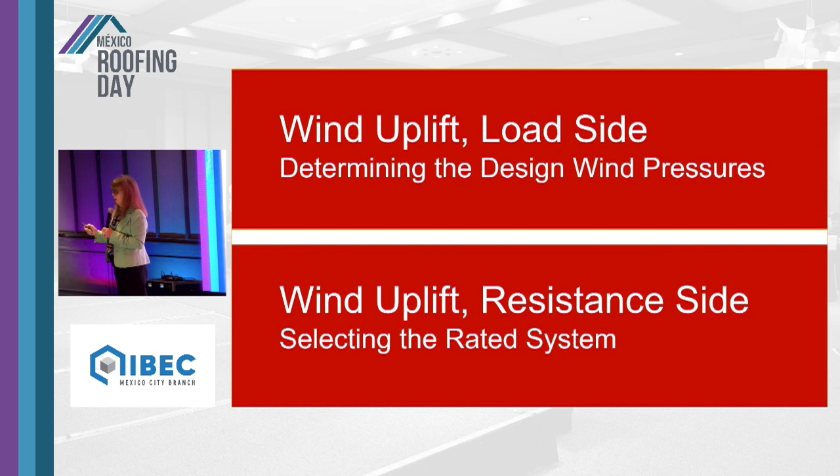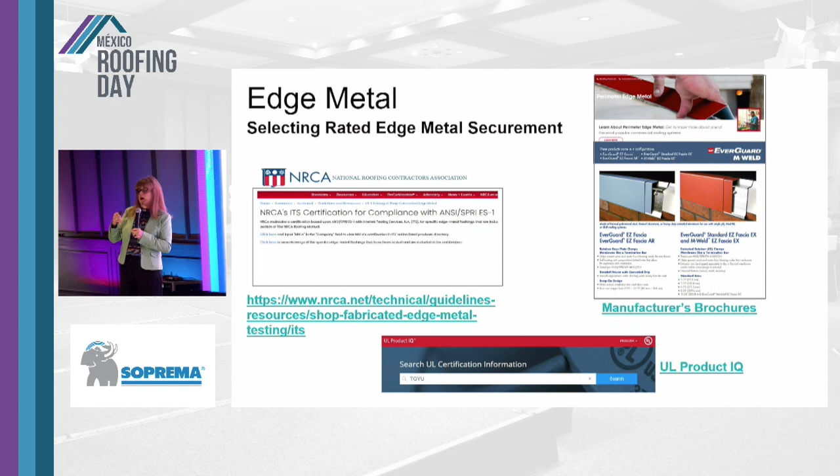We talked about the different roof zones and how to navigate that, how to calculate fastener patterns for each of those zones. I would encourage you to look up more data on a sort of convoluted roof system and how complicated that can get on determining whether you need zone 3, which is an inside corner.

And we talked, of course, about our edge metal and how important that is in helping to keep the roof on. So we need to really be thinking about this in terms of systems. It's not just the waterproofing membrane, our single-ply membrane, for example, PVC, we're putting on a building. It's our insulation, it's our cover board, it's our securement method, it's our edge metal, and all of these are combined to have a system that will hopefully resist these hurricane uplift forces.